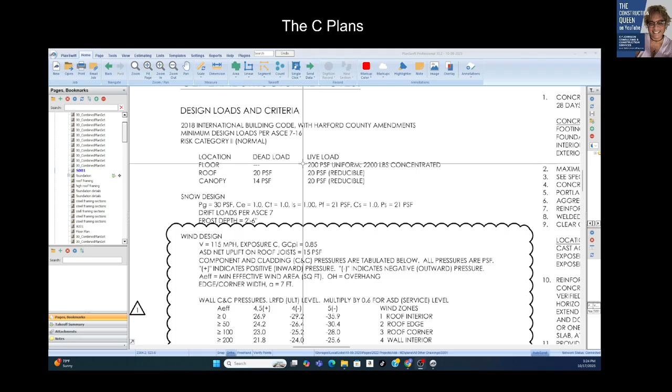So let me transition the screen. All right, so we are looking at the cover sheet for the structural set. If you look at any cover sheet, you're going to find load information. When they say load, it's basically weight and how much the building can hold, including the building itself. As an estimator, it's not really something you care about, but it's good that you understand it. Part of the quiz is to help you understand that, so let's talk about the different types of loads.

There are three different types, and the structural set is designed to address all three, depending on the purpose of the building, what the building is going to be used for. It has to be designed to carry the weight of whatever's inside the building and hold up the building itself. So we have three types of loads: dead loads, live loads, and environmental loads.

The dead loads are basically just dead weight, permanent weight. That consists of the roof framing, the walls, the concrete slab, everything within the building is part of the dead load.

The live load, that's temporary or movable stuff like people and equipment and snow and furniture. Then we have environmental loads, which are wind, hurricanes, earthquakes, seismic activity, and soil also takes into effect. Depending on the type of soil you have, it really depends on the type of foundation you're going to have to hold that dead load and all the live loads that come through, plus all of the environmental loads that could happen every winter.

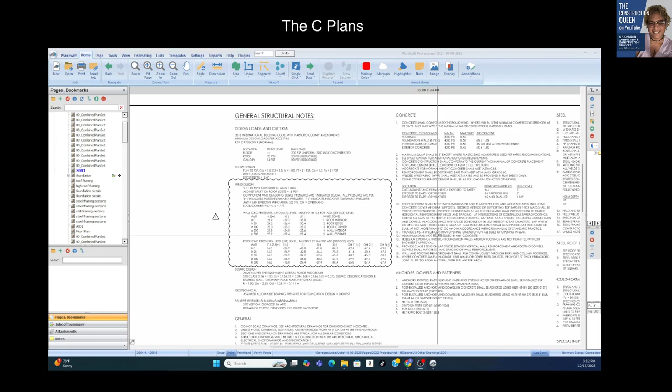Okay, so now let's look at this, this is the cover sheet. Of course, the cover sheet is going to give you all the information about what is here. This isn't so good of a cover sheet because I don't see the sheets that are comprised within the set, but they're here.

All right, so the foundation. When you look at a set of plans, they're usually starting from the bottom up. So the first set you'll see would be, and it really depends, I shouldn't generalize, but in most cases you'll see the foundation.

Okay, so what do we see? It's the bottom, and the foundation comprises two or three components. It really depends on what the building use is. We have the slab, and it's going to tell us the thickness of the slab on grade.

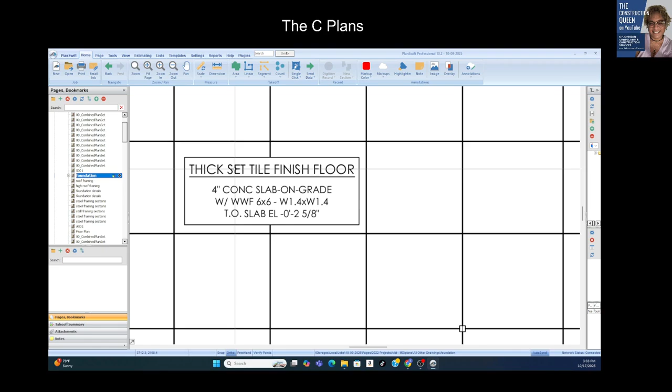And W/WWF is not a wrestling team. It is a configuration of mesh rebar that we put in the slab for reinforcement. We have to know what that is. And then we have the foundation, the foundation footing, or the perimeter of the foundation.

So a foundation is pretty much three components: the slab on grade, the continuous footer, which is basically the perimeter, and all of the section views outline where we have to go to get details about the configuration of what's representing a foundation footing.

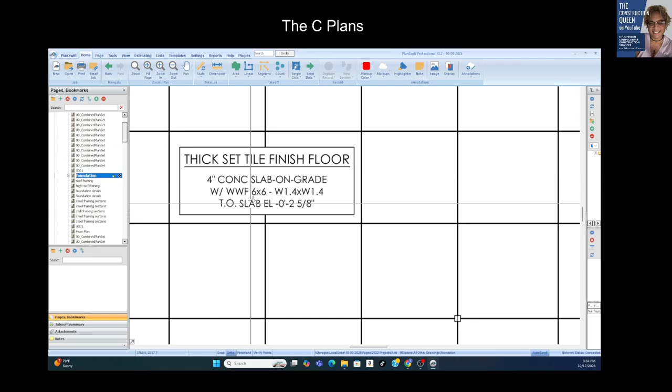So how do we know the component parts in a structural set? Everything, you look at this, it tells you thick set tile, finished floor, but it's on top of a 4-inch concrete slab on grade.

So we know the structural set is the set with the least amount of plans, the least amount of sheets, I should say. We have the foundation, the framing, we may have the shear walls if it applies, and then the roof framing shows us also the headers. So we don't have very many sheets in a structural set.

And everything that comes after that are all of the details and the section views. So when we look at the foundation plan again, a foundation is three component parts: the slab on grade, the continuous footer, and in some cases we're going to have column pads, which is represented here.

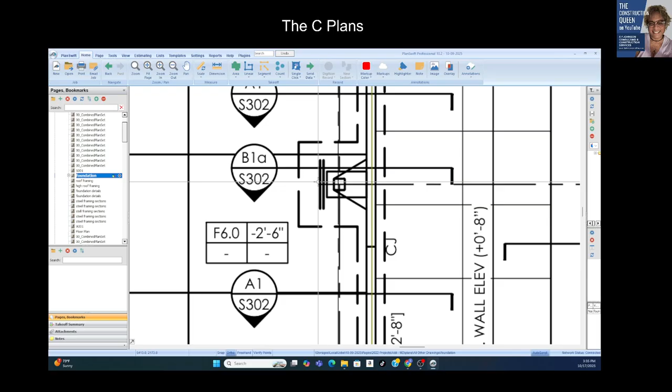So how do they represent the column pad? It's just a square. Imagine in a parking lot, there's always some square piece of concrete that something is sitting on, maybe a light pole or whatever. It's the same thing here, where the column is represented by this symbol, this square. That tells me we have a column inside what they call footing 6.0, and the column pads are always square, so they don't have to give us the other dimension. It's 2 foot by 6 inch square, so both sides are 2, 6.

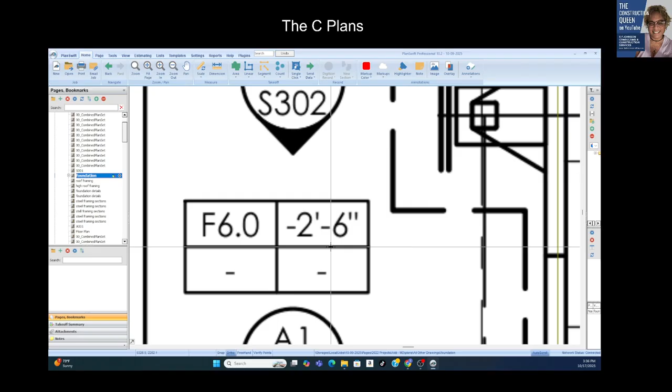So I mean it's really simple. This is the plan view, the view from above, the most basic of the views. What can we do from the plan view? The only thing we can really do is measure the area of the concrete pad, and we can also measure the continuous footer.

But it looks like, and I don't believe that this is from the ground up. There's a lot missing, this makes no sense if it's from... yeah, see, existing slab. So it's just a portion of it getting replaced.

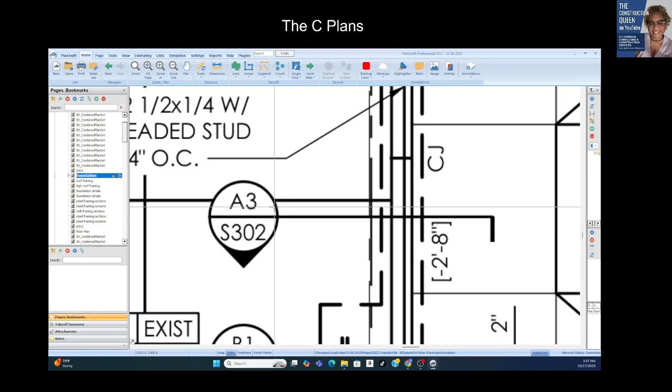So what we have to do now, if we were going to do the takeoff, we need to know this is a continuous footer of some kind that's going to be represented when we look at image A3 on picture S302. This is a section view marker where it's his little head, his hat, his leg, and his foot.

That lets me know that whatever I'm referencing, looking from this direction, it's only this portion of the wall. Section view markers are very tricky because you see we have so many just lined up, and you have to make sure you understand where it breaks off and continues. And it's really not that serious. As long as you represent the section that you see, you can go over by 5 feet, you'll be all right.

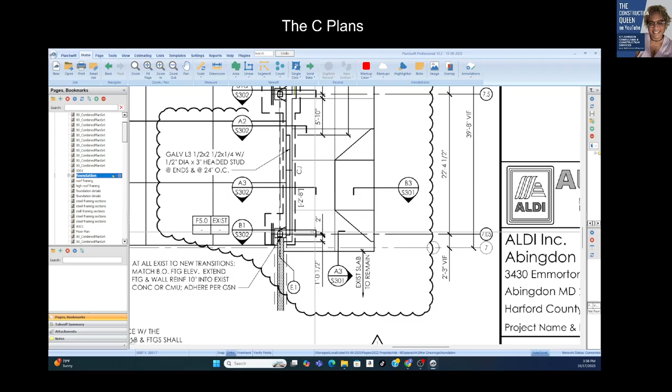So what this tells me is that A1 over 302, that is the section of the continuous footer from here to there. But we have that in quite a few places, right? So it's from here to there, and we stop where we see the other section view marker.

It's so confusing sometimes for the first time, but not to where you're going to lose your mind. You just have to know where to start. And this is kind of lame, but let's look at what it's trying to show us.

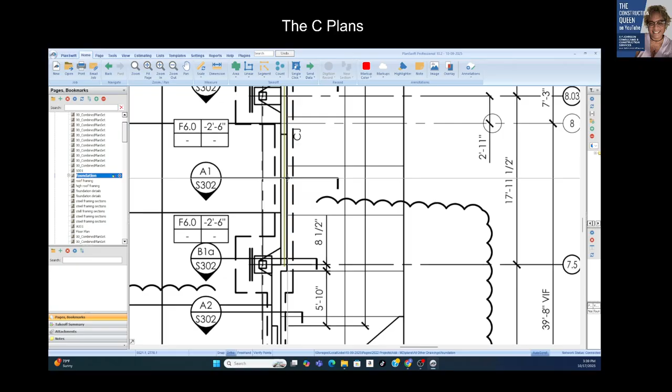Every time I mention a section view marker, whether it's a wall or a continuous footer, you want to think about it this way: think about the view you're going to see at A1 over S302. What am I going to see? Well, I'm going to see the interior construction at this portion of the continuous footer.

So you want to imagine that his leg is a knife, and this is a little piece of French bread or whatever, and you're going to cut it and open it up, and jump right in the middle, and look in the direction that his little hat's pointing.

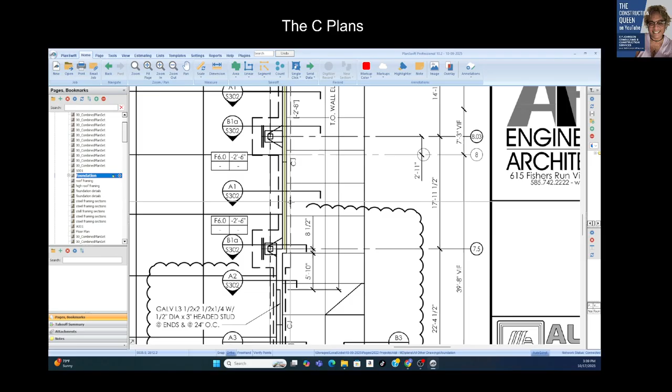And what you're going to see is just the interior construction. So why do you need to see that?

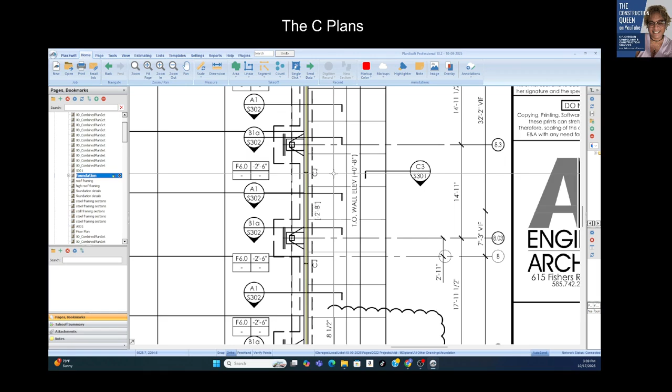Well, if I'm the concrete person, I know that that continuous footer has a depth and a width and a height, and all of that. I have to be able to determine what that is in order to do a proper takeoff, to determine how many cubic yards of concrete I need, how many linear feet of any particular size of rebar. That's what we have to do.

All right, so let's go look at any one. Let's go look at image A1 over S302. We got to find S302 somewhere over here. A1, 302, 301. Okay, image A1, it always starts up here and then go to, like, so stupid how they do.

Okay, so what do we see? We cut it like a knife, and now we're looking in the direction. So this helps you tremendously, right, if you're the concrete person.

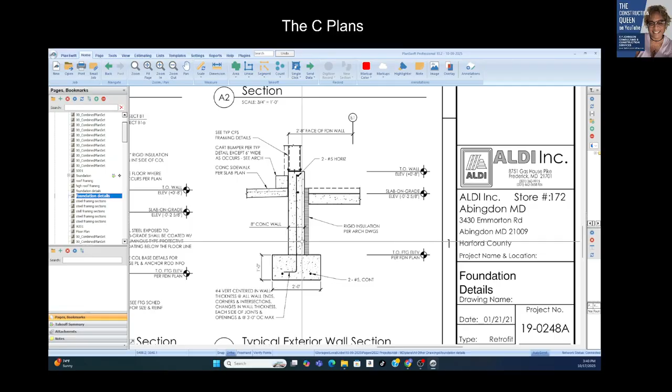Now I know that the continuous footer is 2 by 1, and I know that it has a stem wall, pretty much we can call it a stem wall, and we can determine, because it is to scale, the height of the stem wall and the rebar configuration. I have L, I got to put in.

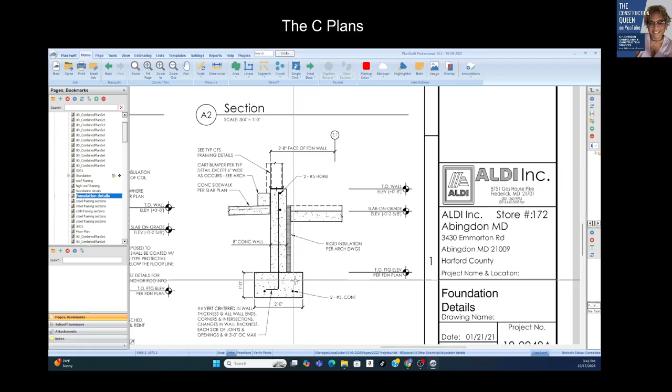So what's this mean, right? This, it could pretend it's a piece of rebar, right? We cut it like a piece of French bread. Now we're standing in there and we see how the bread is made. It's pretty good, huh? The bottom, we have, let's start from the very bottom.

So we have two number 10, number 10. I've been doing this all day and talking. Okay, two number fives continuously.

What's that mean? So the whole length of that section that I measured, in this case, probably going to be the whole perimeter. This one section is probably the general footer, typical, right? Typical exterior wall section. So it's going to be 2 times whatever our length is of the perimeter wall. 2 times that is our number 5 rebar. Bam, we got that takeoff, done.

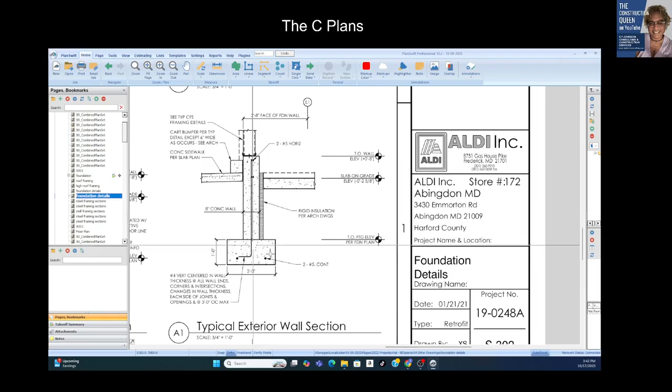For this one, we have to make it an L, but we have to determine the height of the L, right? How long is this piece? Well, it's to scale, so you really don't have to guess. Okay, so you can measure.

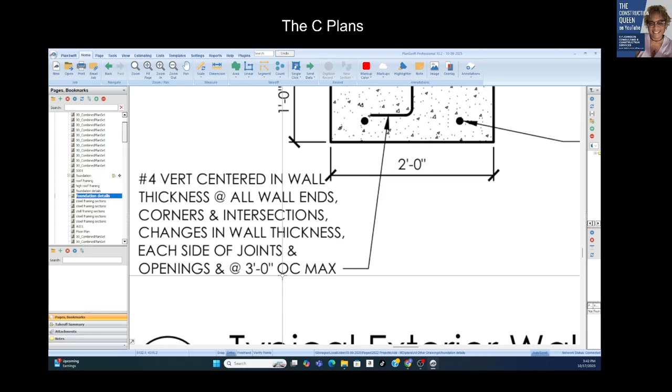So I need, and we're going to put it at every, what? Every 3 feet on center max, right? So we need to produce these L's, right, and we have to put one every 3 feet. So if we had 300 feet, right, 300 divided by 3, then we'd have to make 100 of those and put it every 3 feet. That's how that works.

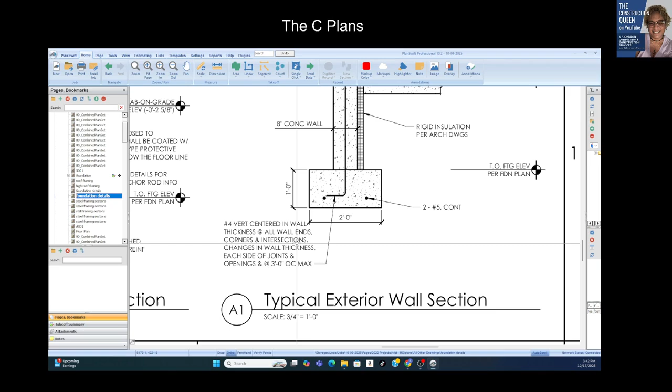So 100 times whatever the length is, then okay, I have an additional number 4 that I have to produce. And then you work your way, you just go all the way up. And then we have two number fives horizontal along the perimeter.

So basically, in terms of rebar count, it doesn't make a difference, it's the same. So you have four number fives on that perimeter, and then however many of those you have.

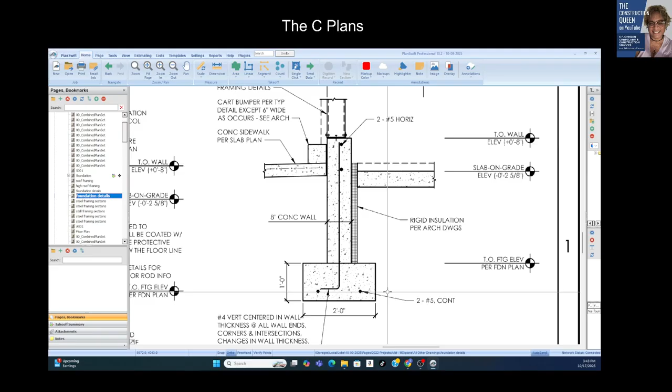And now cubic yards, you turn everything into cubic feet first and divide by 27. That gives you how many cubic yards of concrete. And again, your concrete needs three dimensions, right, in order to get cubic. Cubic is three, so we have one dimension is the width, and then the height is the second, and then the third dimension is the length. Whatever we determine, we measured the length. So you multiply all those together, that's cubic feet, divide by 27, you got cubic yards.

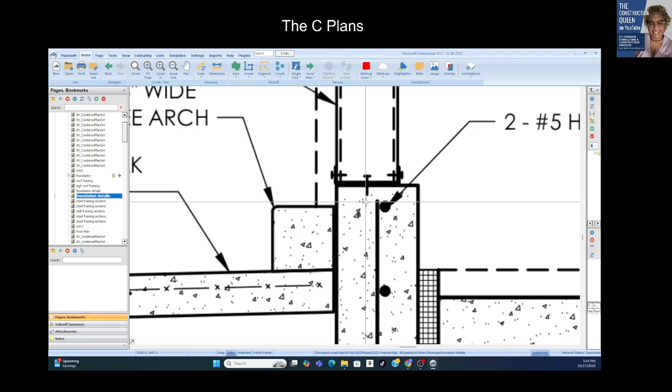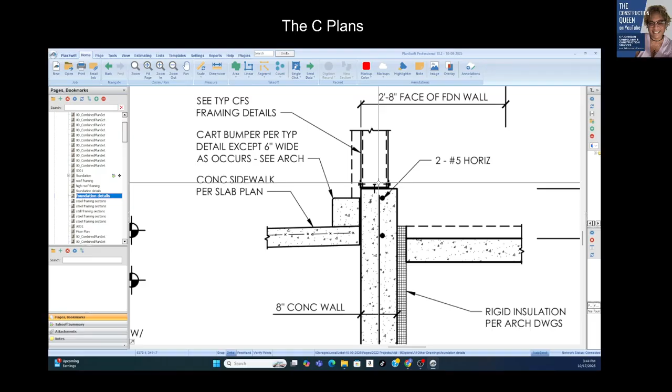Same thing with this. Okay, what's the width of this wall, the height of the wall, and however long it is. And then we have these. How many? We got to do those. If we're the structural portion, those have to be in, or maybe not, it all depends. But we see that they're not marked here, so they're not giving us detail about it. So it's somewhere else in the plans. We won't worry about it.

Okay, but we just want to focus on, and all of the section views will give us the same thing. So existing is already gray, so what do we not have to worry about is this at all. We just have to do whatever the new stuff is.

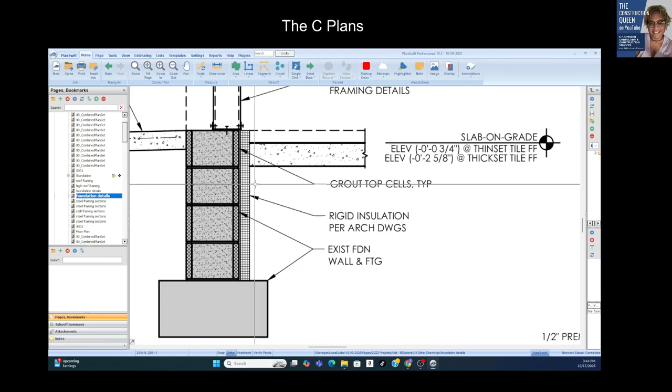Okay, so we have to do all the new stuff - the insulation and whatever else. The section views are critical, and it's good when they're to scale, so you don't have to guess. It's easy to eyeball it because they'll tell you, oh, this is 2 feet, and I'll figure if that's 2 feet, then that's another 2 feet, maybe that's 8 feet. I don't know, but it would be somewhere to tell you.

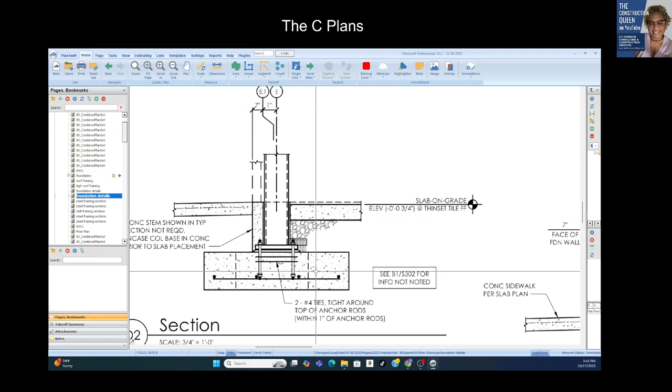All of the footers, there's a schedule for each of them, so you know the dimensions. And they're always square, so if it's a 3 foot footer, column base, it's 3 by 3. All right, so that's the foundation.

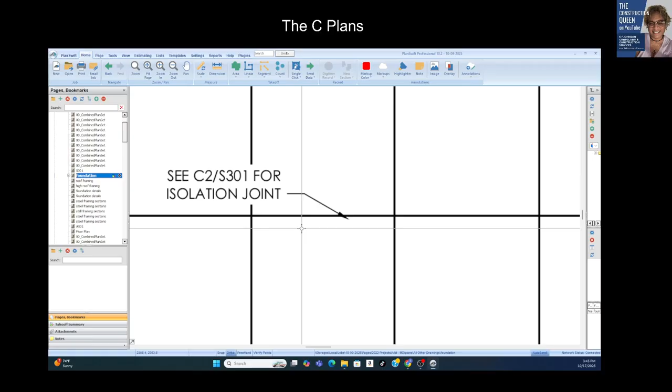That's the first part that we'll see. And there's always other stuff - we got to do other stuff. All of the control joints, you got to look at the details on exactly how they want the thickness of it, what they want in it, all that good stuff. You got to be able to look at that. So when you measure the length of the control joint, whatever you see there, in terms of material and the takeoff, it's the same length. Same thing with the footer, okay.

Now let's look at this one, because it's giving us a section view through the column pad. So it's not giving us information about the continuous footer part, but about the column pad instead. And what they could have done, if all the column pads are the same - which they probably aren't, or if they are, they wasted a lot of ink - they could have just done one and said TYP. So every time I see that symbol, I know it's the same makeup as the one they put TYP next to. If you ever see that, that's what it means.

And then here, they're giving you how you have to reinforce the new to the existing. So that's really important. And the revision cloud means they made some changes. I see a lot of revision clouds without that, but you have to have it because it's pointing you to what to read, what was changed.

All right, so let's look at one of these to see the difference between the section view at the continuous footer and the section view at the column pad.

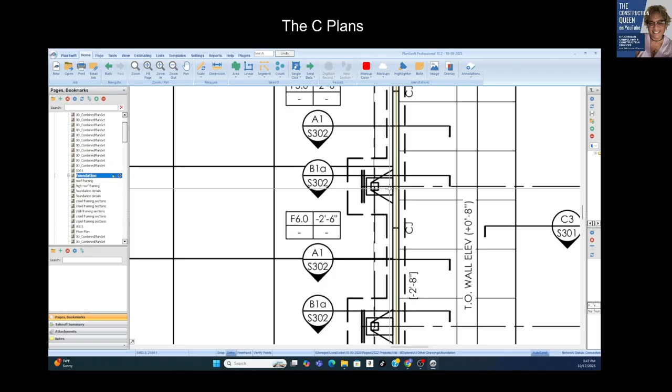B1 over - it's getting late, and I'll be 61 in December, so I'm blaming everything on age these days. All right, B1A over 302. Let's see, keep always going too far. 302, 301, 302. All right, B1A, where is it?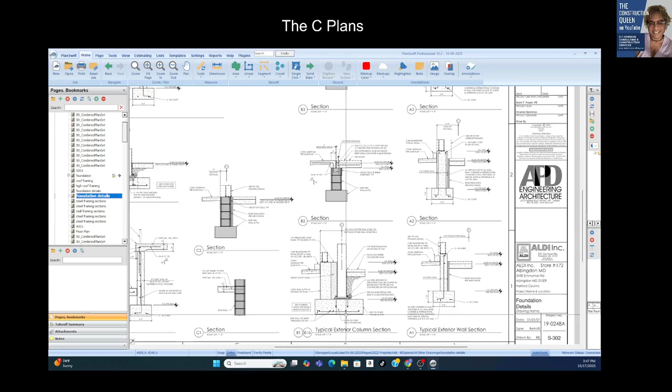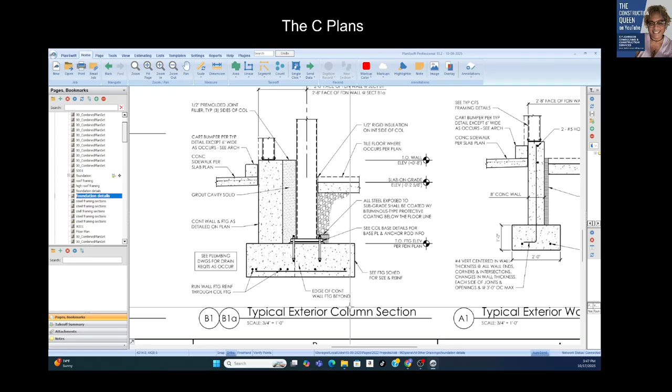Here we go, okay. So yeah, that is our column right there - that's our column pad, edge of continuous wall. The continuous footer beyond that, it cuts off somewhere inside, maybe adjacent, but we can see that from the plans. So what we have to do in this case, it's got a lot going on.

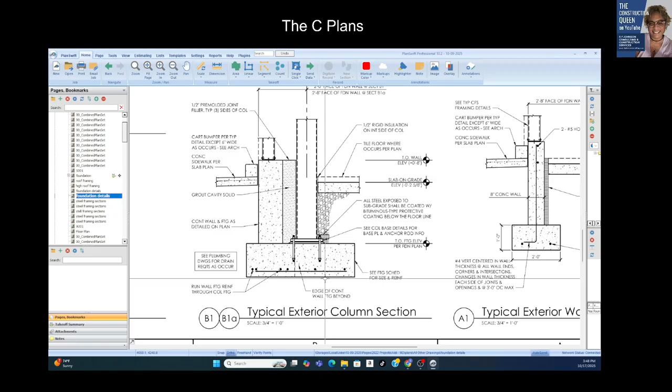So yeah, it has this column pad, and then we have to determine this total. Again, it's probably just up against, next to the column pad. You have to see how far this is, the continuous wall as detailed on the plan. So we'd have to see that one, because there's a couple of costs related to this when we talk about the takeoff and breaking it down.

The footer - and look what the footer has on it, a lot, right? So the footer has one, two, three, four, five, six.

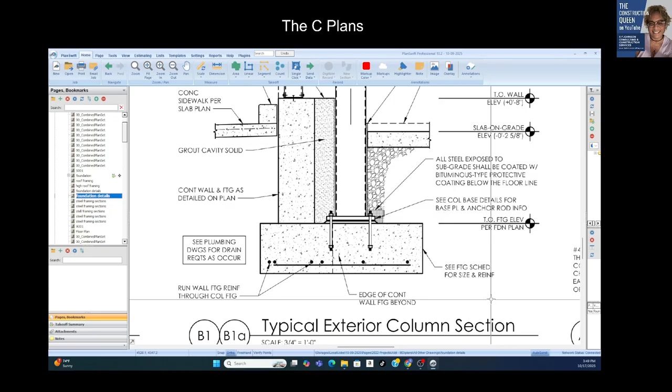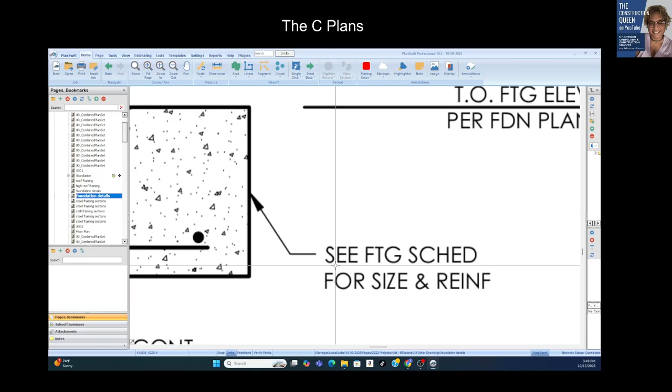Let's see, it might be on the front part, you never know. And I don't have my glasses on, so I'm really tripping. Oh, there we go, there we go.

So we only have 5, 6, and 6.5. Okay, so they're 5 by 5 by 1, 6 by 6 by 1 and 2 inches, da da da da da. And that's okay, so one has 5 number whatevers, and 6, and then 8. That's easy - my grandson says that's easy.

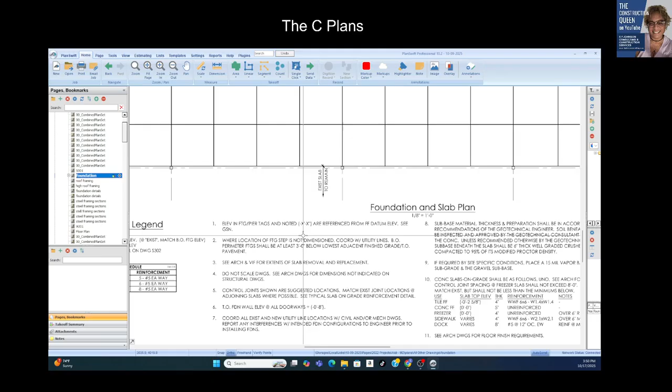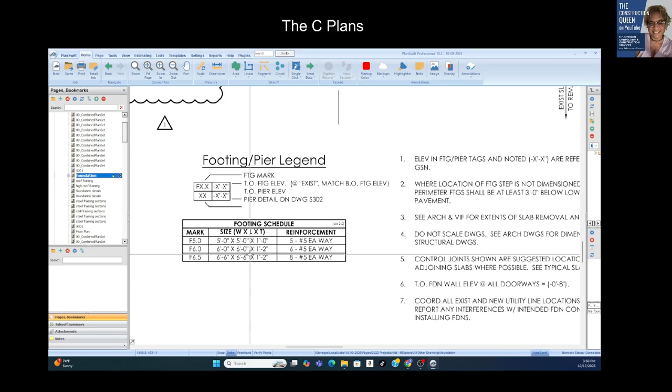And if you have a good tool like we do, you will get the cost per column pad. It will include the concrete, the reinforcement, the excavation, and maybe finishing - I don't know, something else. And that's how you do that.

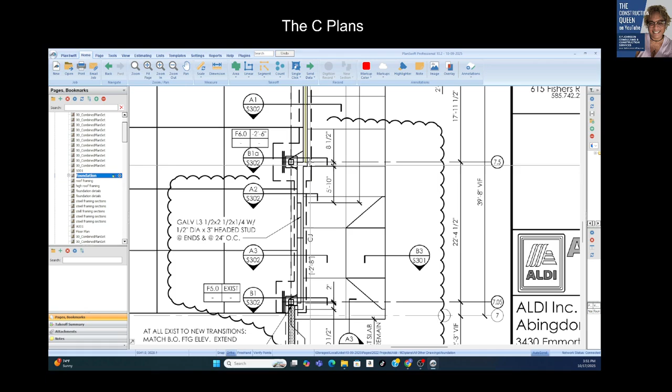Okay, so the length is based on the plans, that insulation, that wall. You know what I see? Maybe this, whatever. Let's see where that wall is. That's very hard to determine. Maybe right here, that's kind of tricky. I just have to guess. It looks like more from here to there. We'd have to determine which side was the wall and which side was the insulation. Oh, that's probably the wall side, and that's the insulation. Makes sense. The insulation would be on the inside, right?

Okay, all right, so that's the first part of the structural set, the foundation. Second part is the roof framing.

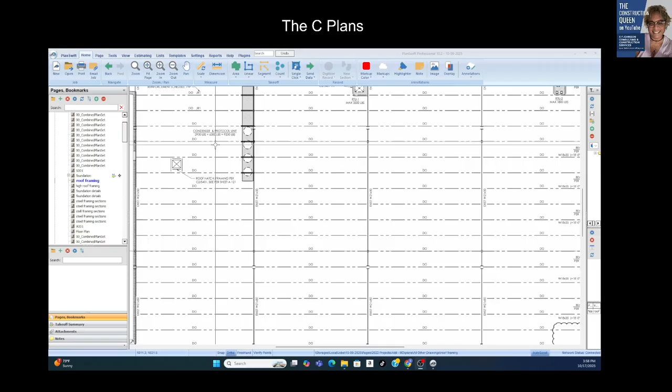All right, so now let's look at the structural framing plan and how they represent the portions of the framing. We know that structural framing always begins at the roof if there is any, and how they represent it really depends on the type of member. We say member, which is a generic term for the framing piece. So a beam is a member, a column is a member, a joist is a member. When we talk about structural framing, we always try to use the right lingo.

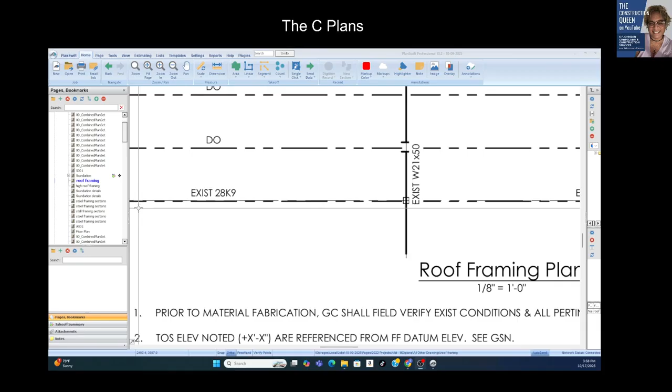We say member. So what we're looking at here is they're showing us that they already have a lot existing. Most of it is already existing, they're just modifying it. But just so you'll know...

There are so many different types of structural framing members. There's beams, there's columns, made of wood, made of steel, iron, whatever. But we know that this is a formed metal, and this type is fabricated metals. When you see the W beam, that's what those are, beams, right? It could represent the beam or the column.

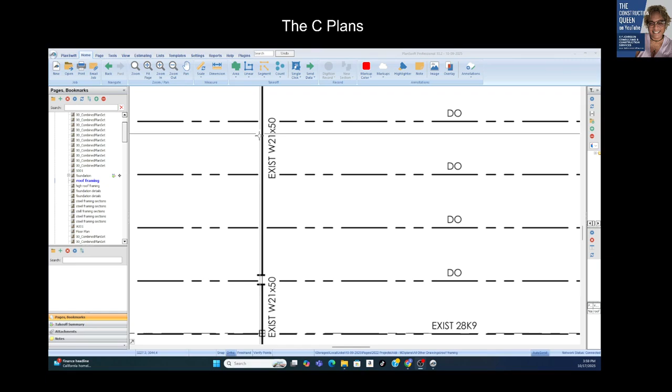In this case, it's going this way, right? It's up against this line. So you've got to think structural framing. This is the framing plan, right? The plan is the view from above. It's the framing plan, so it's as if we're in an airplane, there's no roof or anything, so we just see the roof framing.

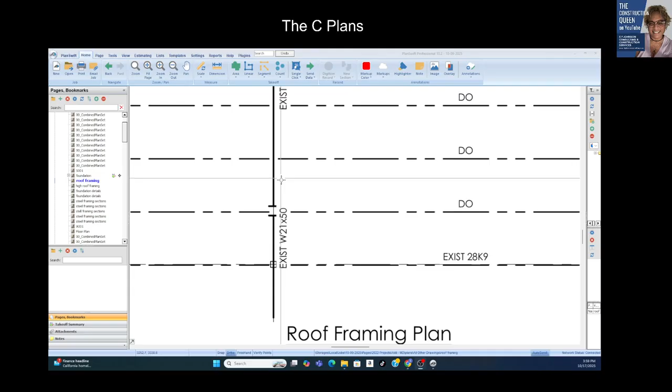Okay, so what we know from the plan is that these portions are W beams. And really, the number on the beam signifies the width of one of the parts of the beam, and the second number represents how many pounds per linear foot. Remember, structural framing is all about loads and weights and stuff. That second number after the times symbol signifies how many pounds per linear foot that beam can hold.

So again, which ones to use and all that depends on the structural engineer. But when you are estimating fabricated metals, anytime you see that, those are priced by the pound, not by the square foot or by the linear foot. And so you have to be able to convert that beam to a weight. It's very easy to do, right?

You basically, if in this case it's 50 pounds per linear foot, you just got to figure out how many linear feet you have. If you have 1,000 linear feet, then you multiply 1,000 times 50, and that's the weight, typically in tons. Yes, fabricated metals are priced by the ton, not by the square foot, not by the linear foot. So anytime you use beams like that, you have to do the math and determine how many pounds you have.

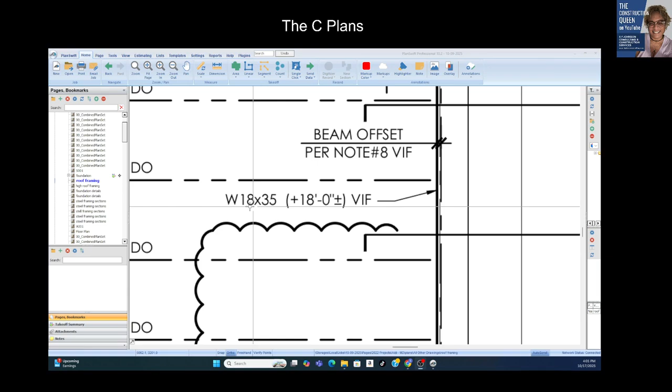All right, same with W18 by 35. What's that mean? That means that it holds 35 pounds per linear foot. So once I know how many linear feet I have, I can determine the weight easy.

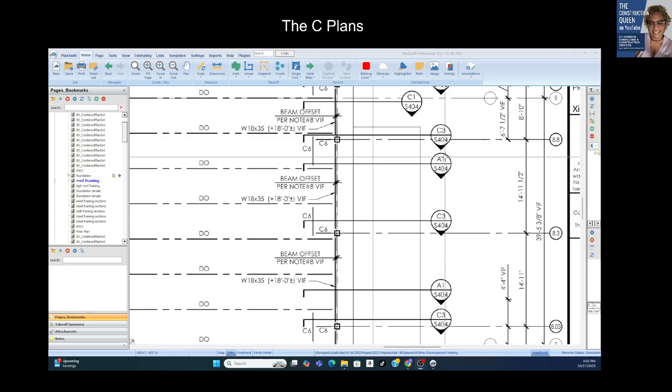Okay, section views still apply, you know. Now let's look at some of these, because these section views don't apply to the foundation. Even though some of them may be the same, typically they're not, but even if they are the same, we're not looking from the perspective of the foundation. We're looking from the perspective of the framing, okay, and all that good stuff.

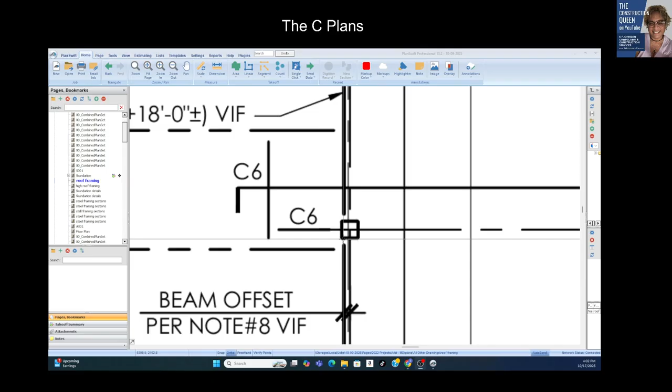Okay, so we know that this is column 6. We don't see that column pad because I'm sure column 6 is sitting in a column pad that we just saw on the foundation. But why don't we see it here? Because this is not the foundation plan. This is all about the framing and the headers and all that stuff.

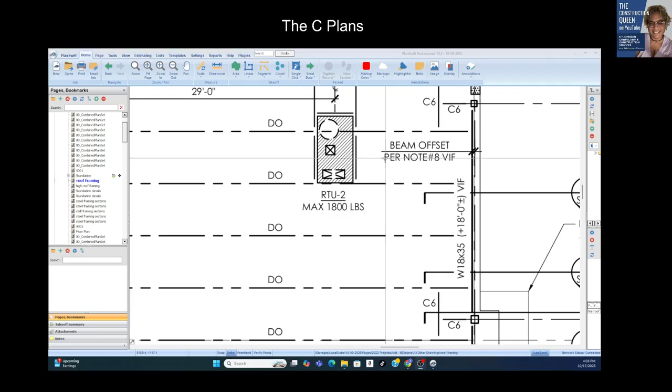All right, if there are any headers, it looks like we have some new rooftop units installed. They're heavy. And it does say typical here, so whatever we see there, we can just do one and multiply it by however many we have. It looks like we have 2. As you see, when it's typical, we see here framing C2 S401 typical.

So I'm going to go there and do those measurements. This helps me a lot too. Now they say, do I need to? And I say, if you're in construction period, you should know how to read every set of plans, because there may be a time where the HVAC person or the HVAC estimator needs to know the size of the supply and the return grills.

Both of those have supply grill symbols, but you can come here because everything's to scale. So I'm sure I can measure that if I needed to determine something, or if it doesn't show me the size of my 90 or whatever I need to go up into the supply grill or the return grill, I could go to the structural set and make a measurement and be close enough.

That's why it's important to know how to read every set of plans. All right, so let's go to A1 over S404, steel framing, A1 404. All right, so there's a lot here. For the purpose of a takeoff, oh my God, that's a lot.

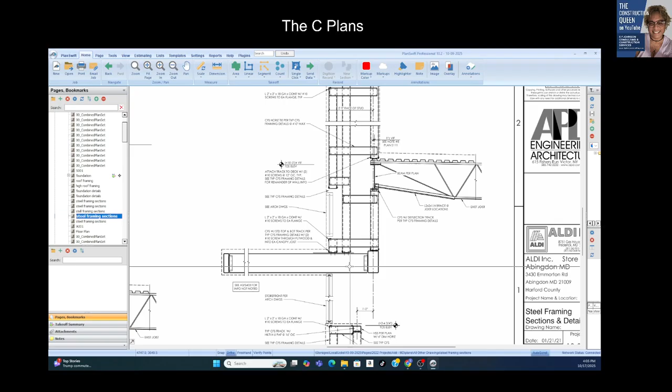What do you have to do in terms of a takeoff? This part, I think we got that in the continuation symbol. We should have gotten that from the plan view, right? The plan view gives us all the horizontal measures, but we need section views and detail views for the vertical measures.

So we got to see what each one of these are. Is it to scale? Because if it's to scale, yes, then all of those little breakoffs and stuff don't matter. I can pretty much see it's 2 by 2 by 18 gauge, see this right here.

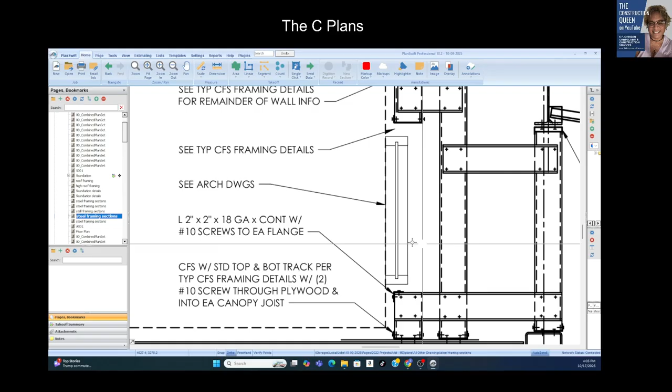This is a takeoff nightmare, but you can do it. You just have to do everything individually, and because it's to scale, this doesn't make a difference. You can still measure accurately. Anything that's to scale is somehow good. If there's a scale, you can scale it and measure.

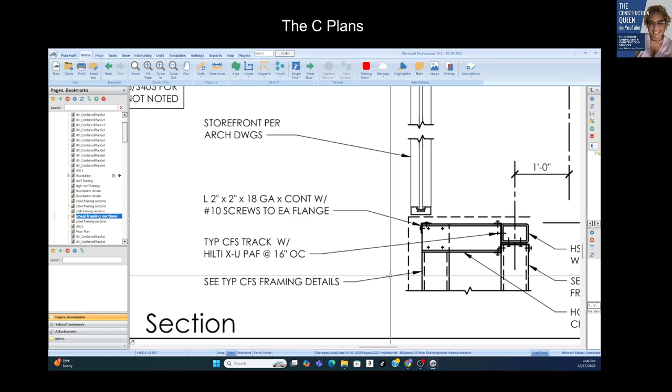Because yes, you would have to measure every piece and part of all of this. This would probably be somewhere else, yeah, because it cuts off. So you got to know what's going on under here. We'll see the typical CFS framing details to get that. We can get that somewhere else, but for the purpose of this section view for our steel framing, we need it for all of this and for this.

I'm sure we have to see something else because that's not enough detail for anything, so they're going to send us somewhere else for that. That's crazy framing, structural framing. That's why structural framing is a whole different beast than architectural set framing, because of this right here.

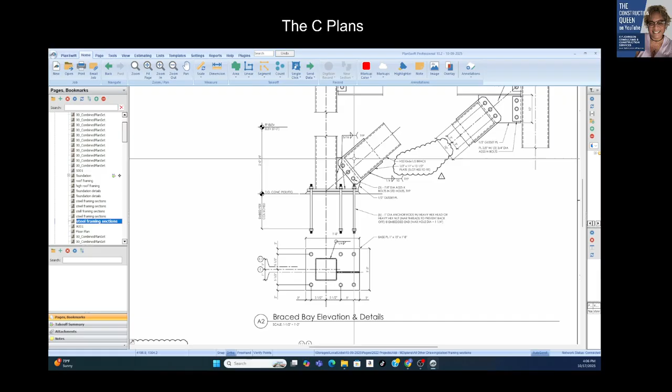And you've probably got a lot of them just like that. Oh yeah, you got a lot. I say, we got to do that, okay, we got to do that. And in order to do that, you got to be accurate, okay, very much so. I did a suspension bridge once, oh my God. But you got to be accurate or don't do it.

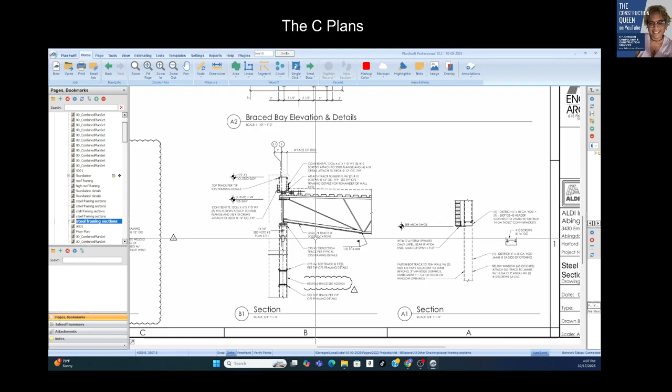All right, so this set wasn't really, I mean we didn't have any shear walls in this one because there is no, I mean it was a renovation. So it'd just be one little sheet telling us to put some plywood somewhere, nothing big. Okay, so that's pretty much the structure set: the foundation, the columns and beams and girders, and all the roof framing stuff.

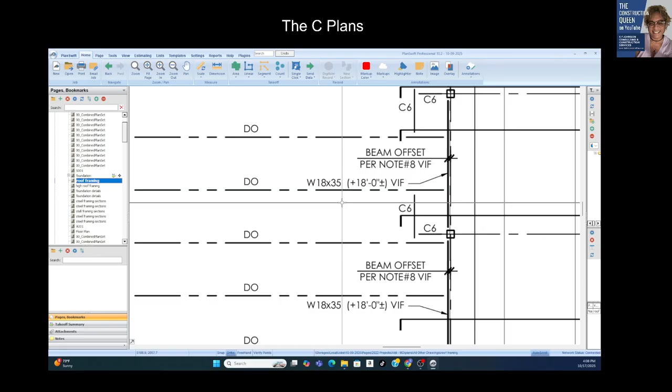Okay, you gotta know your W beams, your I beams. These use W beams. And these, we don't even care what these are, but they gave us the type of these. We don't care about the joists because, or do we? It's not existing, or is it? That's it, see, I don't know.

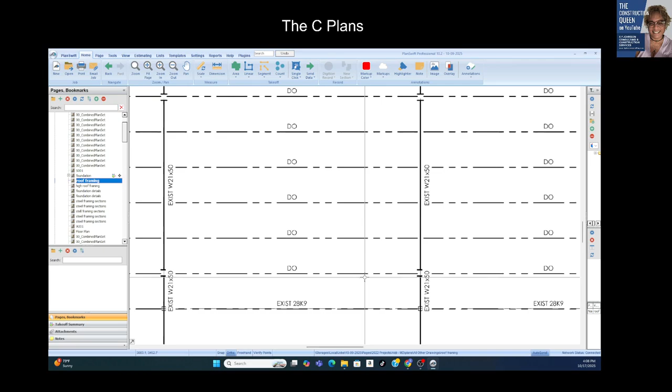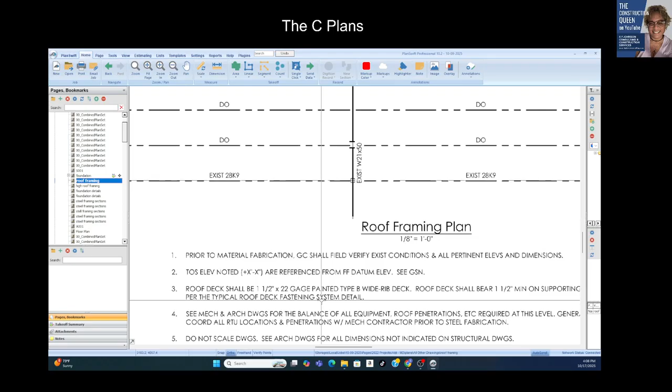I mean, for the purpose of this review, see, yeah, they already know prior to fabrication - verify, because that stuff's not cheap. Okay, roof deck shall be... okay, so the roof. This is all existing it looks like, and then they're putting on a new roof deck that are adequate to support new loads without additional.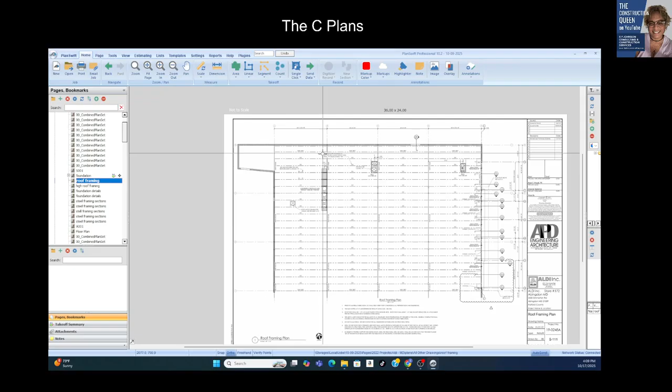Okay, maybe not, I don't know what they're doing, tell you the truth, but I don't care for the purpose of this.

All right, roof framing structural set. Nothing like architectural set framing. I think they have a high roof framing, and some of these are structural steel, 8 by 4 by 1/4.

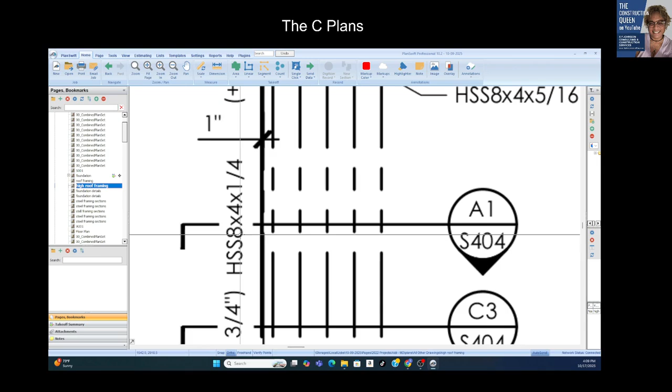So where they put it, they're basically telling you that is the outer portion. And then this is the joist, 1000 S1, 62 da da da, at the 16th, typical, max typical.

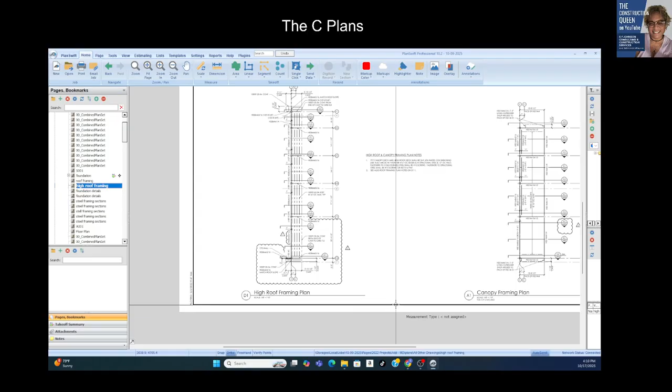And what this represents is a column, right? Because we're looking from the plan view from above. So this is the high roof. They got a little high roof up there.

If we were really doing this, these are all different. See, they changed it. You see how it's a different size for this stretch, and we typically go from column to column, unless it shows us something different.

So that representation of the type of structural steel, pretty much a beam, we would say in terms of length that it's going to be going from column to column. From here, that's a column to there. And then we got to look here and see what the connection's all about.

That's what this is all about, showing us the connection between the joist and the outer portion of the beam.

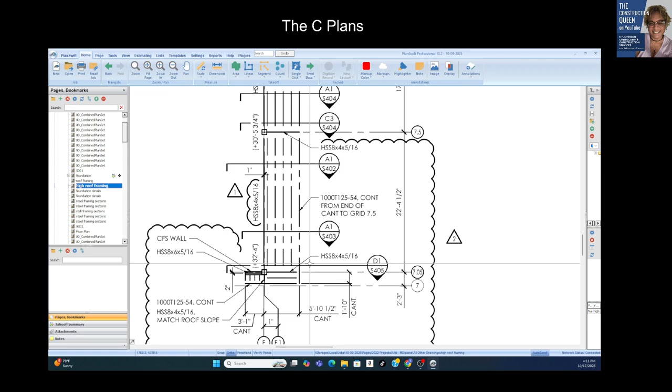It's crazy, and you basically have to - it really depends on how you price it. But you know how you price it for your estimate, and what you'd get off of say a cost book would more likely be a cost per square foot. But in real life, you got to know how many linear feet of all this stuff you have, and how many linear feet of each one of those that you have.

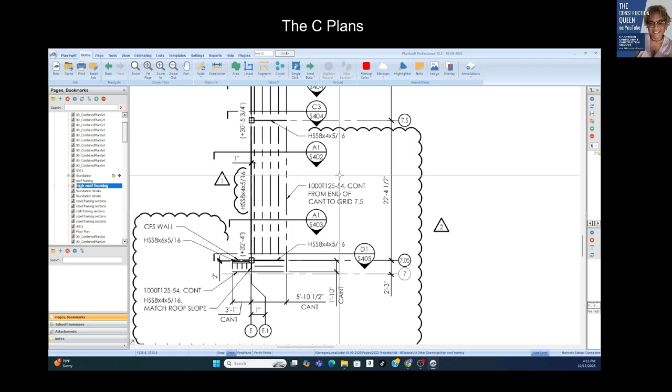So see, it says continuous from end of cant strip to grid 7.5. I'm sure that's what that means. All right, interesting for the structural set. And then more details.

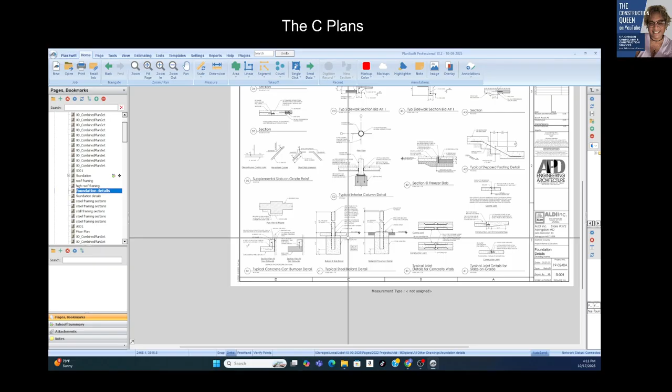All right, so that's going to end this presentation of the structural set.

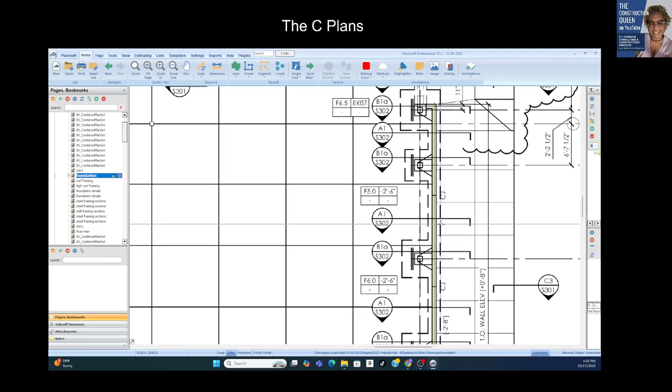So when you see the plan view, that's the first view, right? Plan view is going to always trigger section view. And then when you go to section view, it may trigger detail view. None of those views do you want to bypass - you want to make sure you understand everything you see at each of the views.

Now if you had to take a framing takeoff, let's start with the foundation takeoff to get everything you need. This is the way I do it - the slab on grade is what it is, it's a big square. That's the easiest thing to do if you have an area tool. Boom, it's 4 inches, you know the area. That's the easiest thing to do.

But when it comes to the foundation footing, some portions may not be exactly the same, as we saw from the section views. So when it comes to any of the foundation footings, whether inside the building or the perimeter, just follow all of the section views from beginning to end. I would follow wherever it made sense.

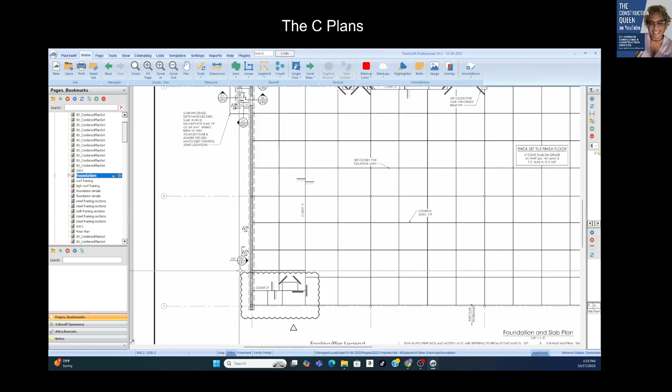I don't think any of this is getting done. So I'm in here, and I'm going to follow all of the section views wherever they lead me. I'll start here, and I know that this is a column pad - it's a column pad that differs from that column pad. See, when you look at the plans, you have to have a very detailed eye to know when things are different, because that's why they're leading you to different section views.

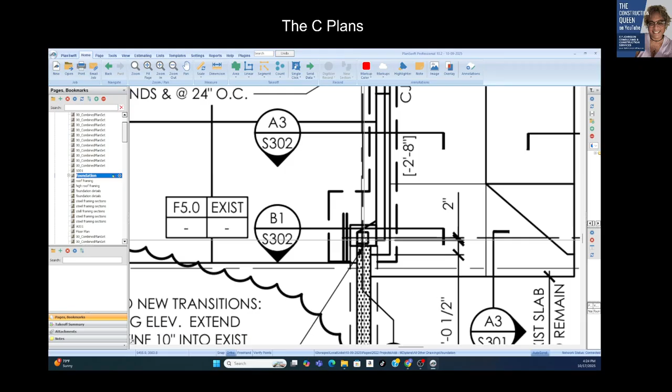That's a column pad that has pretty much all four sides, right? This is a column pad, and I know it's a column pad because I see the representation of a column. And that is a column pad at the edge of whatever this is. So that's one they just put in, and I know why they're leading me to a different section view.

That's B1 over S302, but this is B1A. Why? Because it's different - different in construction. That one has four sides, I'm sorry people, I got to keep sending you the voicemail - and that one has only two.

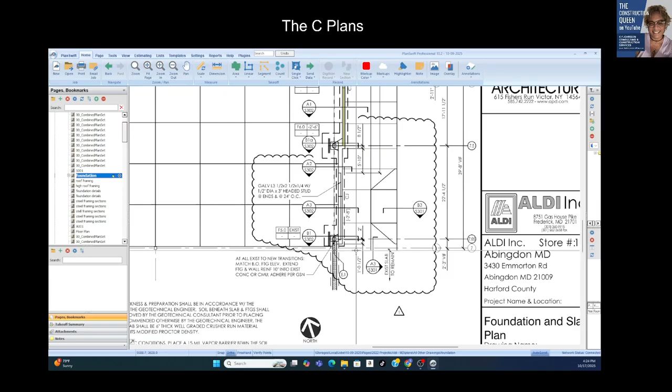So yes, they're going to give you different views to look at. And now look, here I'm going out, B1A, B1A. Those look the same, so once I do one of them, I'm just going to multiply by two, save you some time.

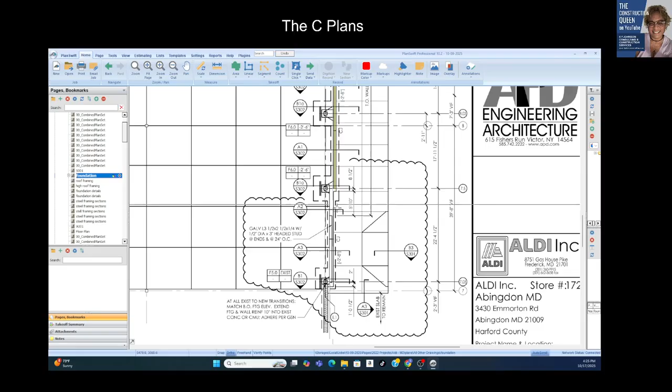It's important to remember this section view is going through this section of the continuous footer, because the architect is saying there's something different about the construction here between the column pad and the next column pad, which is this stretch - something different about that construction than at the column pad itself. So you see A1 S302, A1 S302, A1 S302 - I could just measure all as one, keep measuring, I don't have to break that up because it's the same.

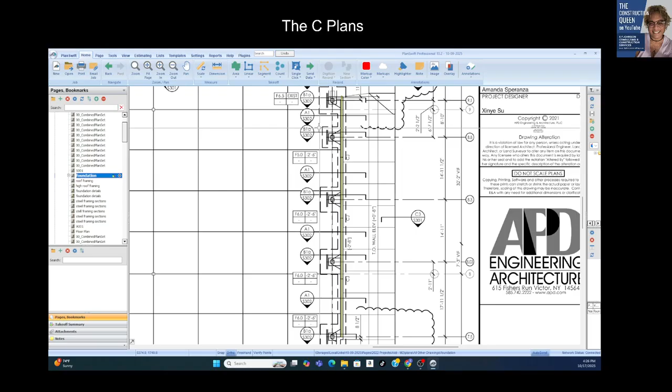It's basically the footing in between all of the column pads. So I'm just going to go all the way down and then incorporate each of the column pads individually, or anything else that's different. So it's a little tricky, but plan view takes us to section view, and section view will take us to some other detail view if necessary - it may not be necessary.